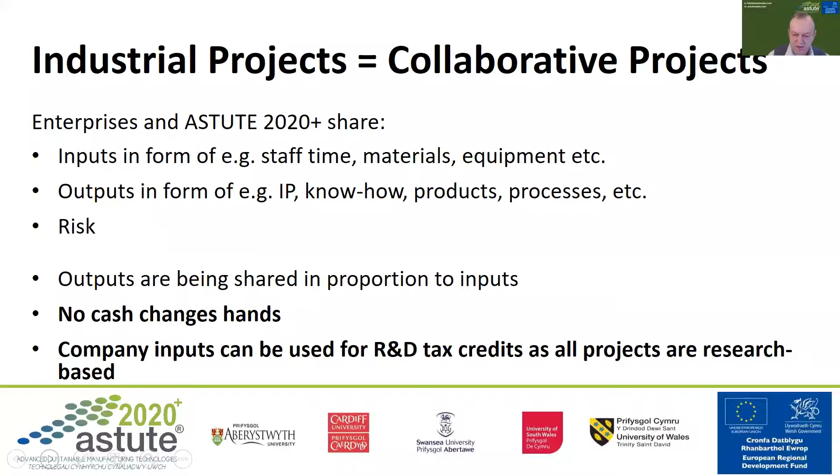Very importantly, ASTUTE is a partnership of the universities which you see at the bottom there: Aberystwyth, Cardiff, Swansea, South Wales, and Trinity St David. Jointly, we deliver this program working with companies across Wales.

There's a lot of information on the web which goes beyond what I've been saying, including contact details. If you want to browse around on astutewales.com, please also look at the project spotlight. Some of this will be presented now, but there are more on the website for you to have a look and get a feel for the kind of collaborations. At which point I'll hand back to James.

Thanks, Hans. I'm getting the feeling that I was about to say it's good to talk. I guess that's an advert that goes beyond most of the people online here. But I think this is one of the things I find: this is not perhaps a project that you know the answer to. This is something you need to discuss and find, if you want, ideas, whether they work or don't work. And I think that's the first place to start with these things.

You might not yet know, and it's good to see Don's question in there, it's open-ended. What on earth could we do with that subject? That is something that will improve our competitiveness, that was something that will improve our process, it's something that will improve our product, etc. It's good to talk, and I think that would be the first place of it. In essence, is that ability to talk to a group of people in the first place.

But I'm delighted now to introduce Professor Mohammed Naim. Mo is a good friend of ours here, and he's got something called Smart Specialist Leader. I always wonder about leaders who've got the word smart in it all, but there we are. Mo, I'm going to hand over to you here because I'm passionate on this one. How are we going to drive competitiveness forward?

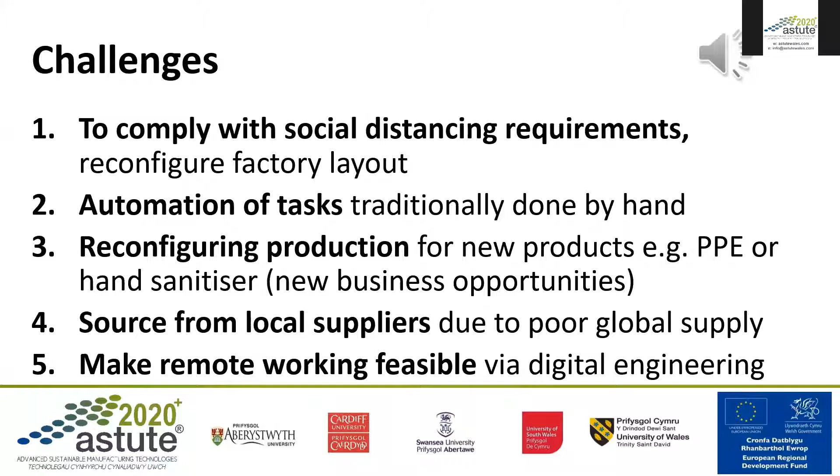So what we have done here with regards to opportunities is just translate some of those COVID crisis-specific challenges into generic opportunities, things we may have done ourselves anyway in order to achieve operational excellence, continuous improvement, but sometimes the crisis actually gives us the motivation to do things more quickly.

So for example, with regards to the first one relating directly to the previous challenges for the previous slide, with regards to social distancing, well actually, looking at our factory layout, looking at ways to streamline our material flows, our process flows, gives opportunity to improve in terms of reducing non-value-add activities and enhancing the value add throughout our total manufacturing process.

With regards to automation and enhancing automation, looking at robotics, for example, to reduce material handling, the opportunities offered by our research in robotics. We can look at ways to reduce the amount of handling actually required by individuals, and looking at ways also for individuals to be working with the robots in a sort of whole systems perspective.

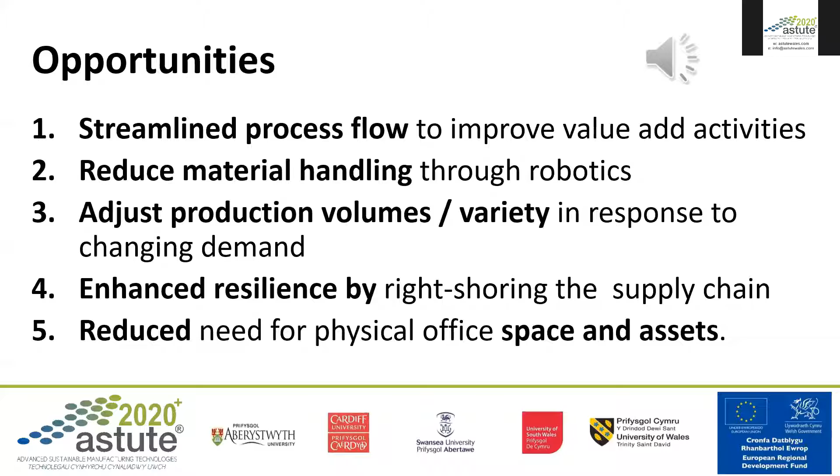new layout and in particular new ways of working. In this case, via gravity feeders for materials handling, avoiding direct contact between operators in relation to COVID. This gravity feed system and new layout led to productivity improvements.

The next one is an example of braking systems assembly in the automotive sector, the development of cobots, where we have within the same space both operators and robots. The main research challenge there is working safely, in this case with there being no longer a need for robots to be hidden behind cages.

The next two examples are both different companies, but both analytical equipment manufacturers. The first one, we looked at understanding and documenting current manufacturing processes, looking to enhance value-add activities within the manufacturing system, and identifying ways to enhance capacity.

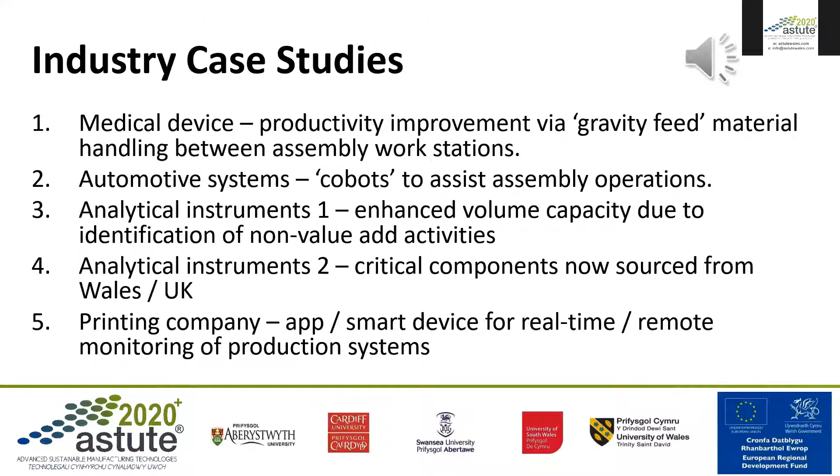I think it's quite clear here that over the last 12 months, we've learned that there are many things we can bring innovation to, and it's sometimes the mundane, but we were never getting around to it until the days we had to do it because of the context we were in. And that's one of the key things. We know that, for instance, productivity will step change after global recessions. Unfortunately, that quite often means people find solutions to do automatically what they were doing manually before. That's just the nature of these things. What we need to do is always do this and get ahead of it.

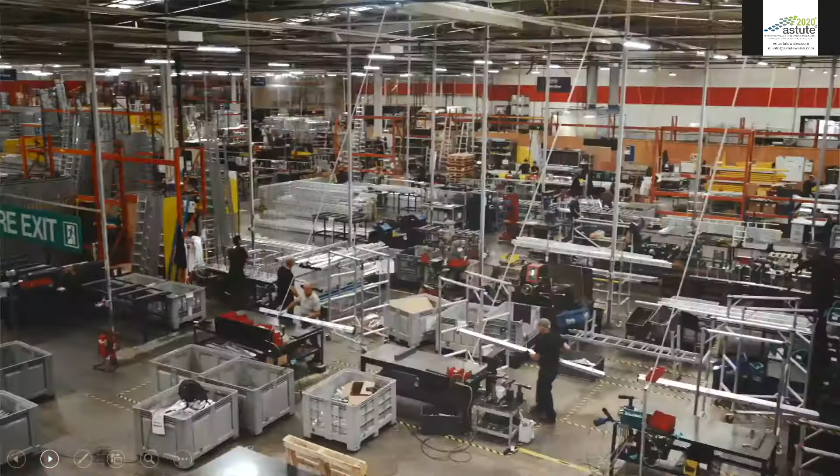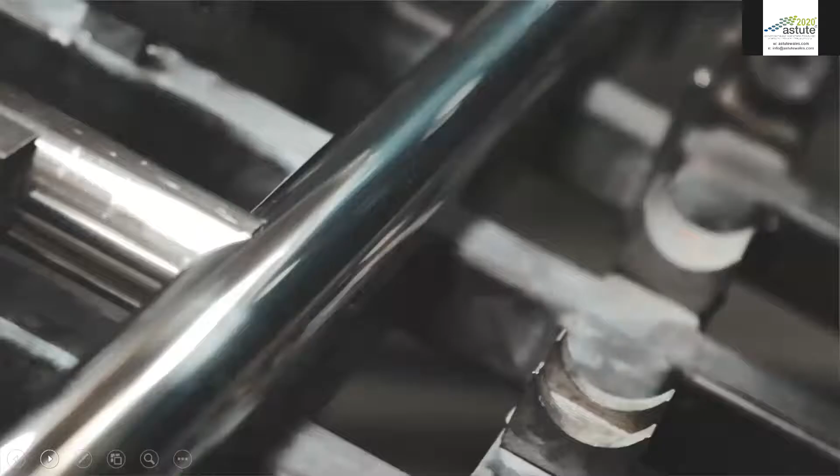We initially approached ASTUTE back in 2012 and have been collaborating with the team ever since on various research projects. This allowed us to develop and understand pre-welding processes and exploit ASTUTE 2020's research expertise to further our own knowledge.

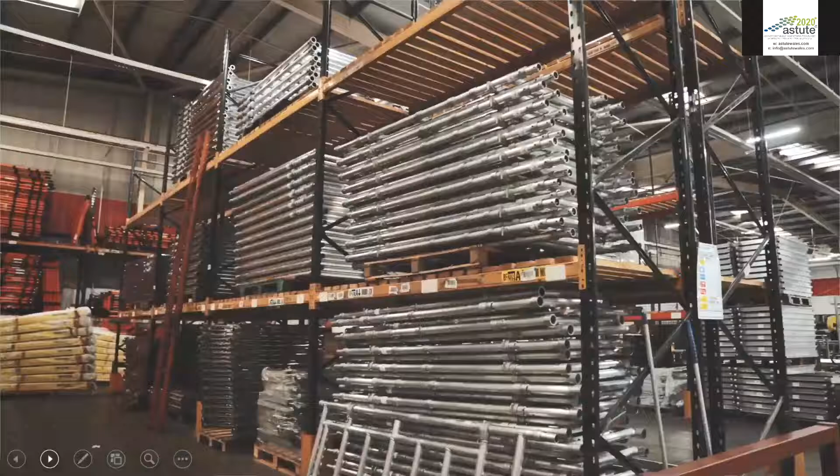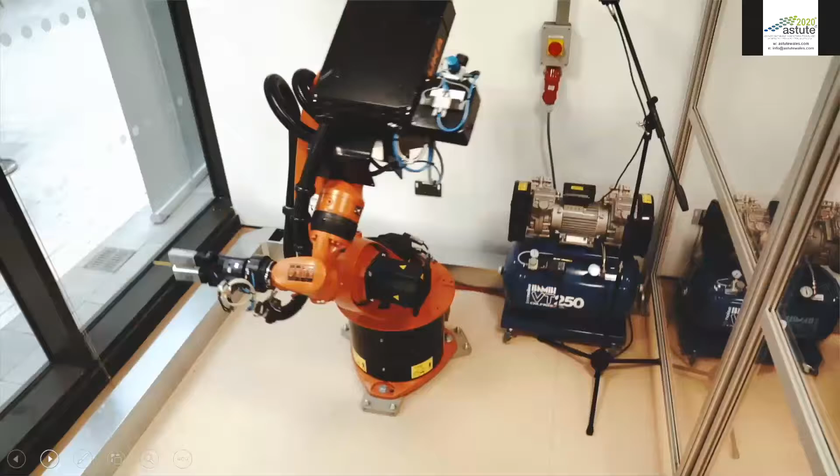We had difficulties in optimizing the robot welding process, resulting in a high number of defects, costing time and money for the business. ASTUTE 2020 were able to support us with their expertise in advanced materials, computer modeling, and manufacturing systems. The collaboration has assisted us to move from manual welding to more sophisticated automation for ladder manufacturing and scaffold towers.

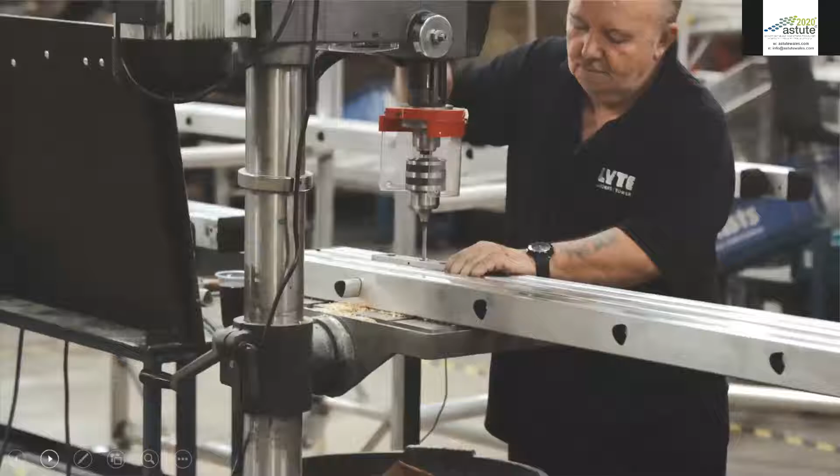As a direct impact of the collaboration, we've been able to increase our workforce, employing 7 new people. We have been able to expand our existing product range, as well as introduce new products to the market.

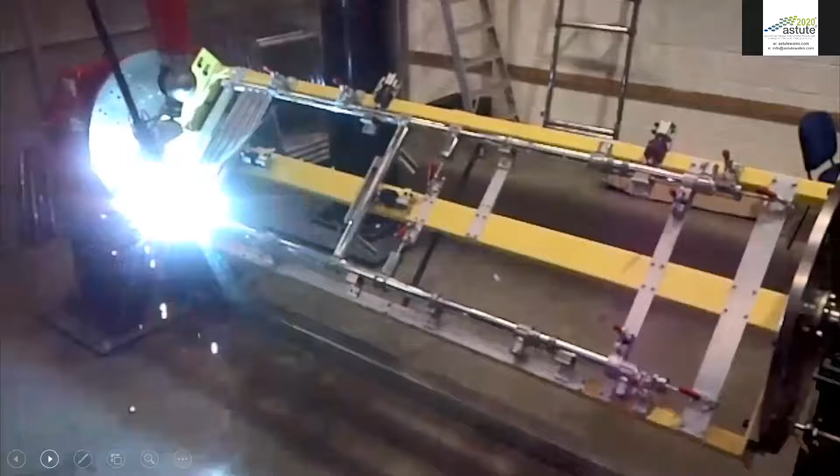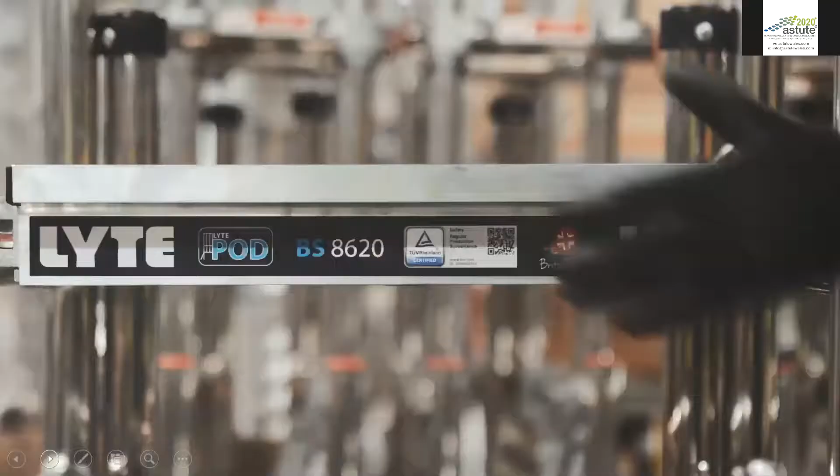The knowledge and understanding of our manufacturing challenge and the research conducted by the team allowed us to have confidence in the project being delivered successfully. Without ASTUTE 2020's support, we wouldn't be adopting advanced manufacturing technologies so quickly in order for us to improve the welding division of the business to ensure a long-term future for the company in West Wales and the Valleys.

It was great to know that this expertise was right on our doorstep in Swansea. We've had a great experience working with Swansea University, and we'd like the partnership to continue.

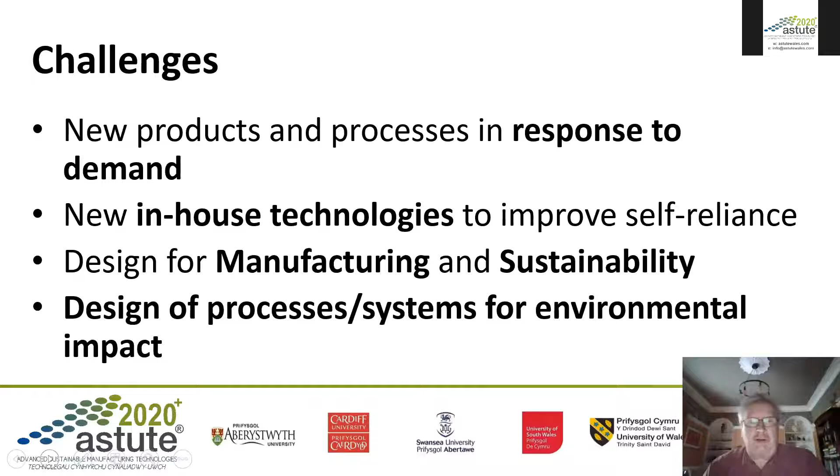ASTUTE is a brand that's been working with Welsh industries for a period of around 10 years. During that time, we have worked with businesses to support the development of new products, to support development of existing products, and to support development of process capability. And we can point to a number of successes in each of these areas.

In modern terminology, ASTUTE has been able to create virtual twins of the product or the process, and that can then be used by business for decision making.

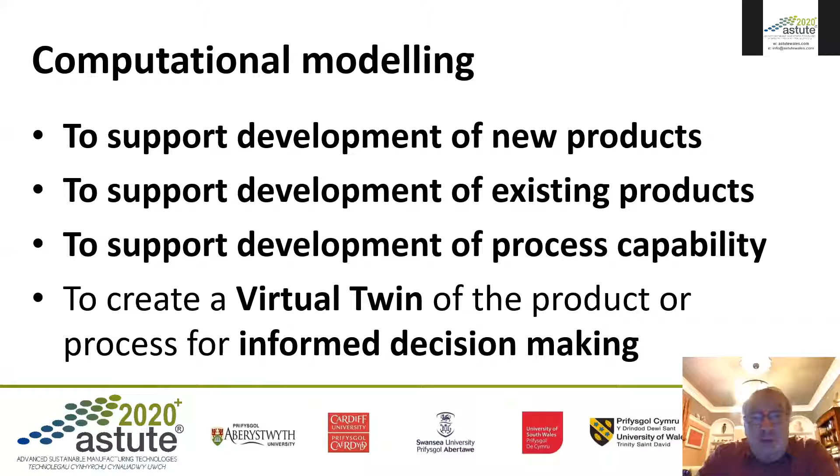ASTUTE offers opportunities to undertake computational modelling, and the expertise in ASTUTE can be set out under three main headings. Those are structural mechanics, whereby we deal with statics, transient, dynamic, and modal analysis; fluid dynamics, where we deal with mixing, separation, and phase flows of fluids and gases; and the third area, which is thermal, electromagnetic, and acoustic. And of course, we can bring those all together into complicated multiphysics modelling.

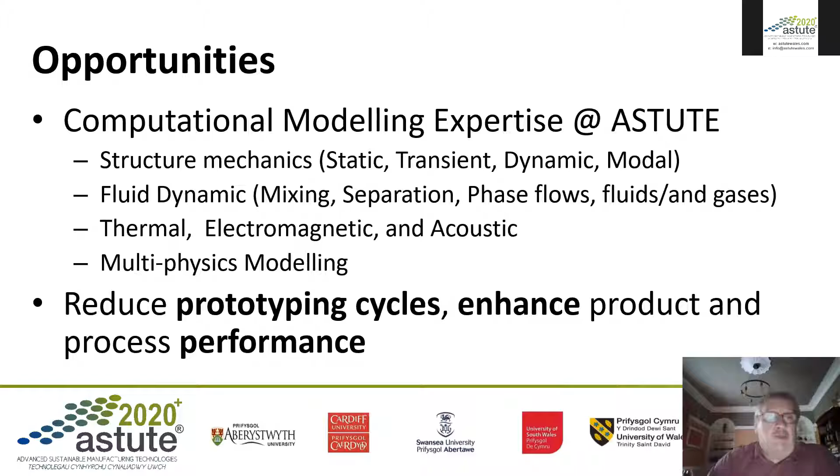And these have been used quite successfully to reduce prototyping cycles and to enhance product and process performance.

We will now look at two industrial case studies undertaken by ASTUTE. The first is aluminium tray forming, where the challenge is to form a perfectly rounded bead on the edge of the tray so it can be processed successfully in subsequent packaging operations. The second is laser trimming of a reverse extruded aluminium can, where the wavy edge around the top of the can must be removed by laser machining, and any particulate formed must be removed from the can.

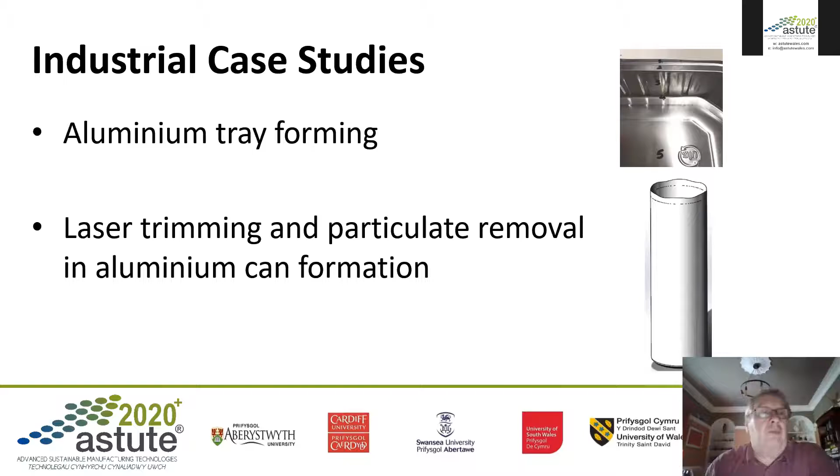We now look at the example of aluminium tray forming, and essentially it comprises three steps: deep drawing, wiping, and curling. Deep drawing is the way in which we manufacture the body of the tray itself, and this is a complicated process in that you have to have large deformation of what is originally a flat sheet of material. There is contact between the punches and the dies, and there's friction there, and again these parameters need to be incorporated into this part of the deep drawing module.

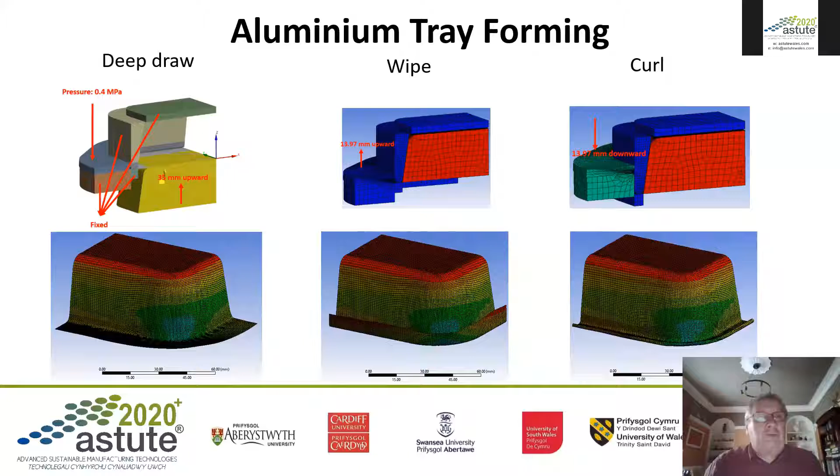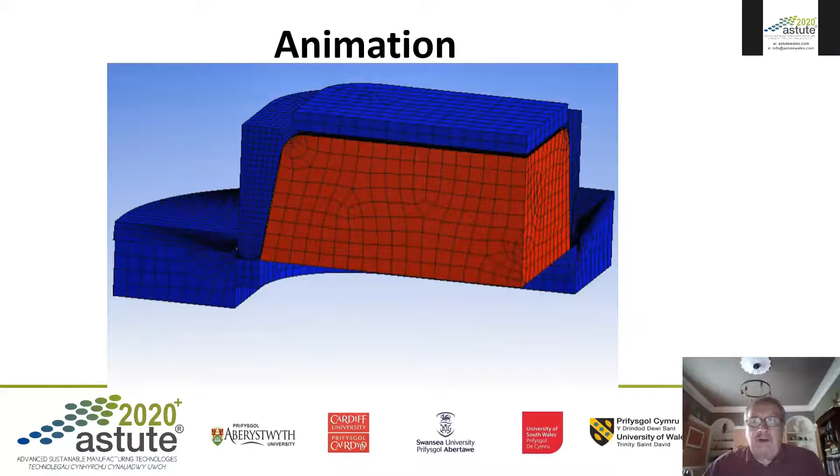This slide will show you the animation of aluminium tray forming. The sequence will show you the deep drawing, wiping and curling stages of the process. It'll all appear very much as a sequence of complicated and controlled tool movements.

This slide shows the outcome from the tray forming simulation, and inset we see an example of the defect on the rolled edge. In doing this work, ASTUTE worked very closely with the business partner, and at the end of all of this identified three potential solutions to address the problem of the tray edge defect. These potential solutions are now being carried through and tested further by the company.

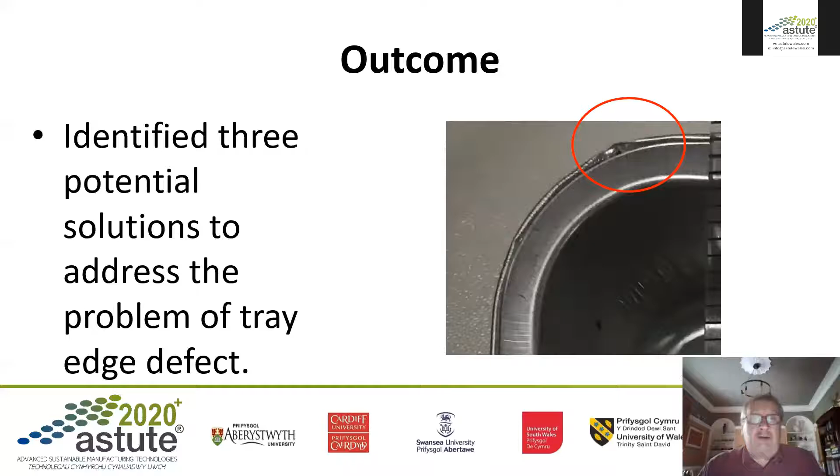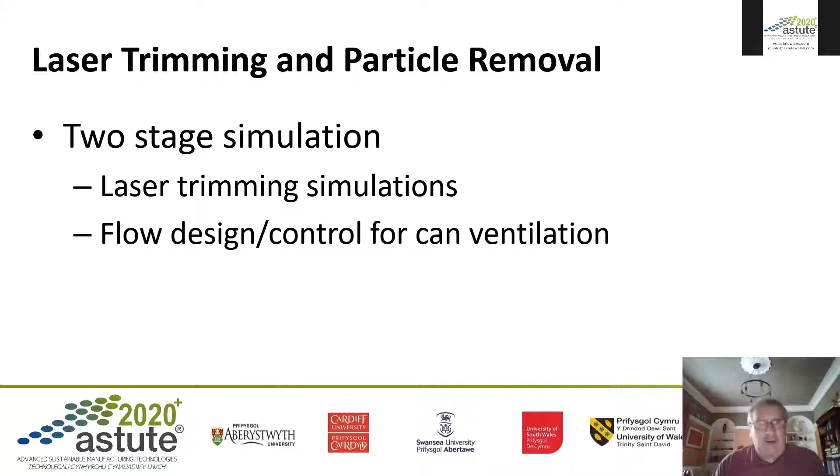This is the second industrial case study, whereby we're looking to trim the reverse extruded aluminium can. It's a two-stage simulation. The first stage is the laser trimming itself, whereby we generate some particulate debris. The second stage is to look at the flow and ventilation in the can in order to remove that debris prior to it going on to the next stages in operation.

This slide shows an example of the laser cutting process. It is a complicated process to simulate in that it has multi-phase flows, i.e. liquid and gaseous phases present. It is complicated by virtue of the fact that melting takes place, and if melting takes place, the material properties are clearly temperature dependent as well.

The model also has to account for the energy that is deposited onto the surface of the workpiece by the laser itself. What we can see here is a laser beam radius, typically 50 micron, to give you an indication of the size. What we see in the animation on the right-hand side of the slide is the penetration of the laser into the workpiece and the removal of the particulate from the workpiece as it goes through.

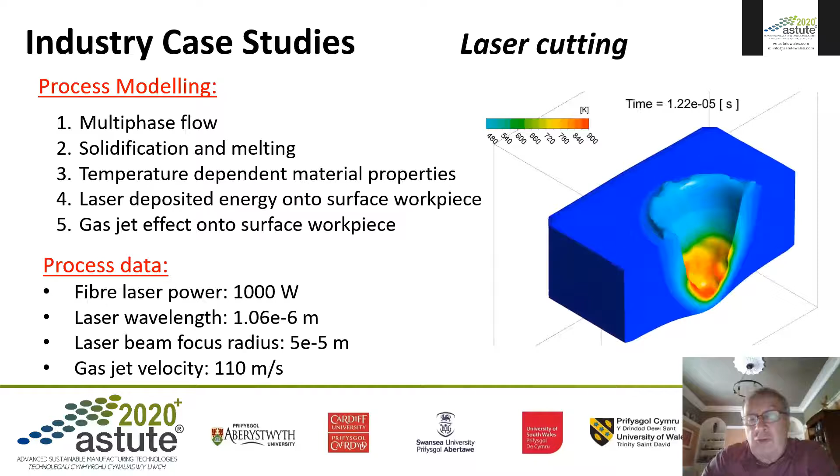This slide shows part of a parametric study into the ventilation of the can in order to remove the particulate. It should be noted that in this study the can itself is rotating and a gas jet is directed across the can at 0 degrees, which is across the diameter of the can, or at 15 or 30 degrees, which is there to introduce a level of swirl within the can itself.

The model is complex, it's multi-physics, in that there's a particulate phase and a gas phase, and the two interact. The aim of the study is to look at the way in which the gas phase will cause particulate movement out of the can in order to clear the can of debris.

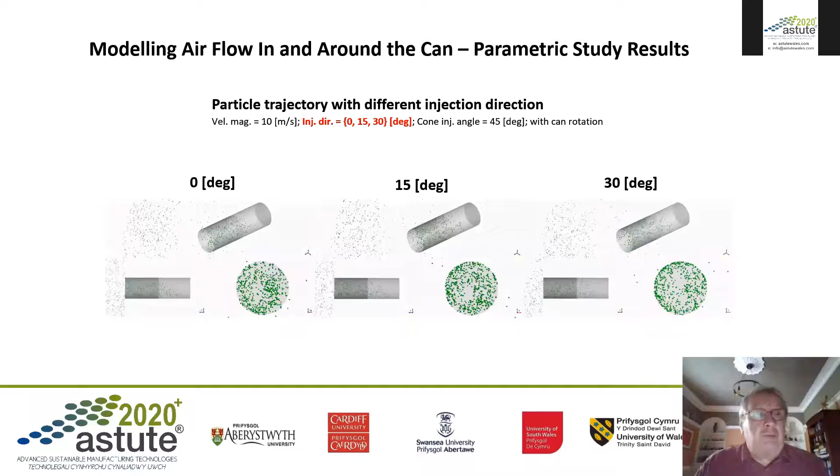This slide shows the outcome of the parametric study presented in the previous slide. What we see here is that, generally speaking, at 0 degrees, 15 degrees, and 30 degrees, there is little benefit, in that around 48 to 51% of particulate remain within the can. Needless to say, there are other parts of the parametric study which showed that there was an effective method of particulate removal, and further work is ongoing at this time to improve the understanding of the ventilation process.

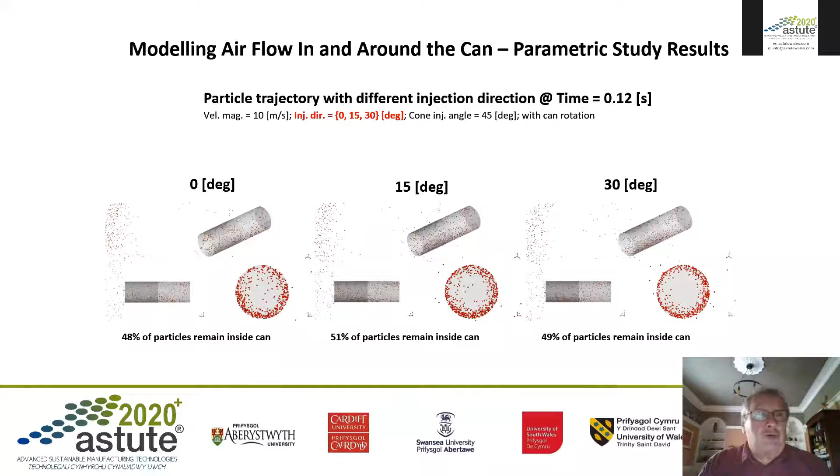So the outcome of the work on laser machining and can evacuation has developed what is really a process virtual twin. And that has aided the understanding of a challenge that has been in existence for a period of around about 7 years.

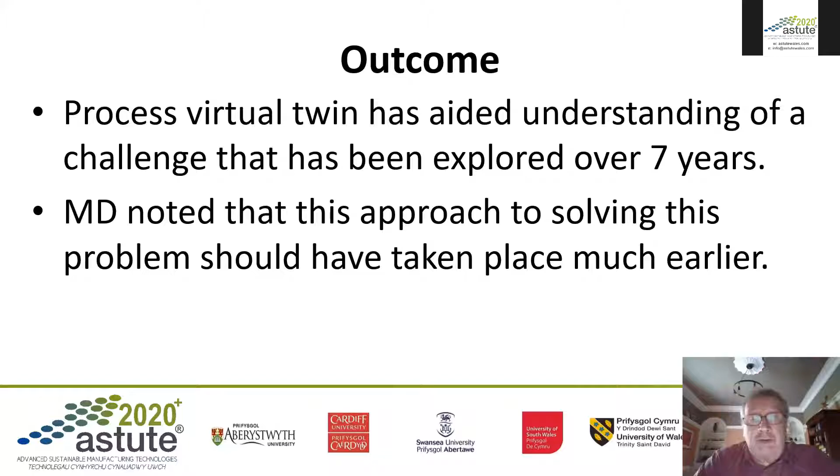Complementary to this is the fact that the MD noted that this approach to solving this problem should have been taken much earlier. And the company is now actively pursuing the opportunities that have been provided from this simulation study.

Thanks, Dave. I always love that presentation. I've seen it once before, Dave, and I love it because it's the bit that you don't say. All the people online are going, well, why did you do the parametric study that showed no difference? Why didn't you show the one that made the big difference? And I guess that relates to one of the questions about confidentiality. The bits that really made the difference are the bits that Dave can't show you, because that's the company's IP advantage right now. So I'm grateful for that.

We're going to move forward now into another case study by British Rototherm. And again, this will be highlighting the computational modeling activity on this particular issue.

Thank you. I'm Oliver Conger, Managing Director and owner of British Rototherm. We're a 170-year-old organisation, and we manufacture precision instrumentation that measures temperature, pressure, level and flow. I heard about ASTUTE 2020 from an organisation called Make UK, and they connected us with the right people in ASTUTE.

They've got a very strong technical understanding, especially around computational fluid dynamics, which was crucial for what we were trying to study as part of this program. The problem we were trying to solve was, what is the noise emitted through one of our restriction orifice assemblies? As pressure flows through one of these devices and it drops, it creates noise, and the noise can also lead to vibration and potential problems for the rest of the pipeline.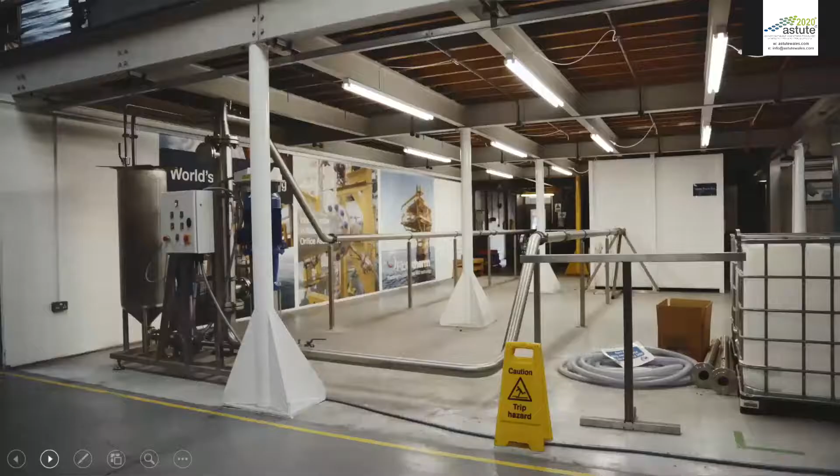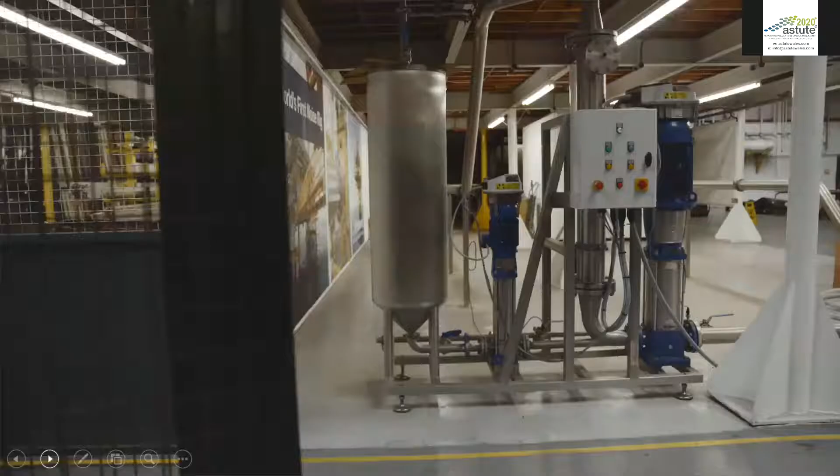There is nothing available for restriction orifice plates, so we wanted to come up with a proven model that we could then take to designing a better product. So from Astute's side, they came in, we broke down the problem into a number of different steps, and together with our own team, we put together a project plan to be able to come up with a model and test that for the restriction orifice plates.

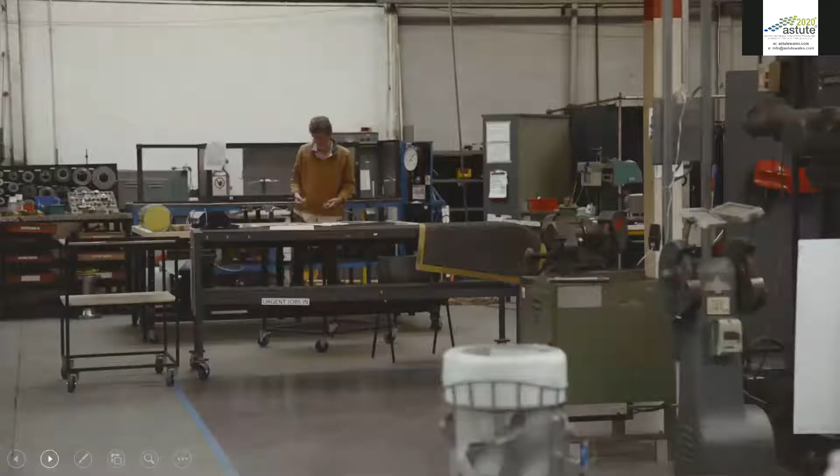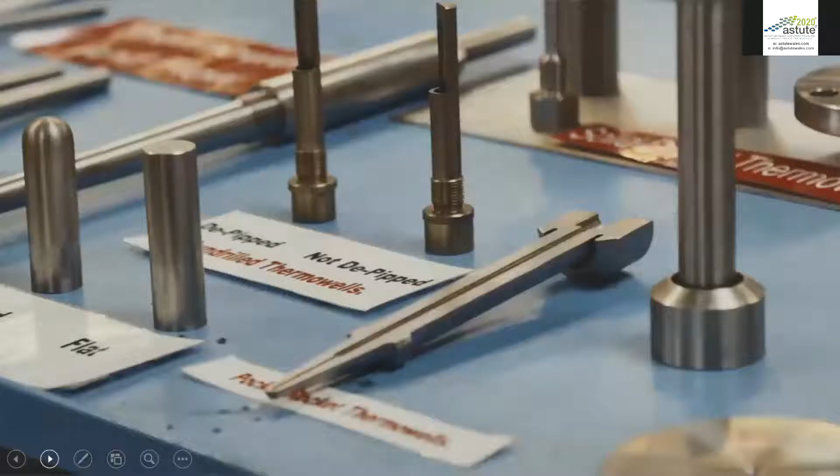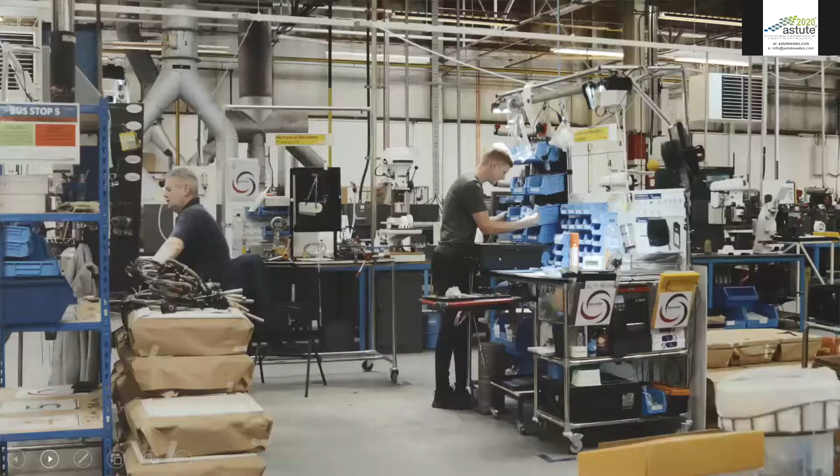What Astute ended up doing, they helped us prove the model, and then that model was tested through some pretty sophisticated CFD software. The orifice plates that we were selling now were designed on a proven formula for noise, which nobody in the world has. From that, we were able to go to our customers and prove to them that our design was able to meet the noise requirements. This has led to a number of significant projects we've been able to secure worldwide, and also resulted in us being able to employ a further 5 people in the organization and invest in additional machinery to really put us as a leader in this field.

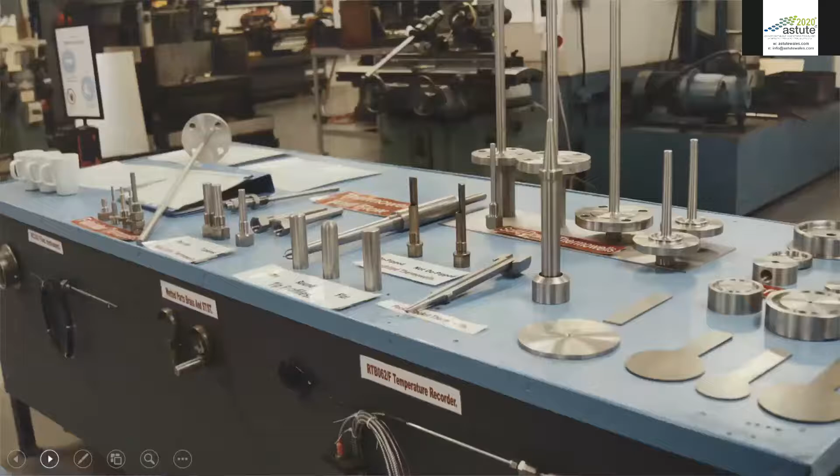The reason for working with Astute, they have a significant amount of technical capability. They have access to programs, software and resources that a company such as Rototherm doesn't have. They can help provide confidence to take something that you may not have gone forward with.

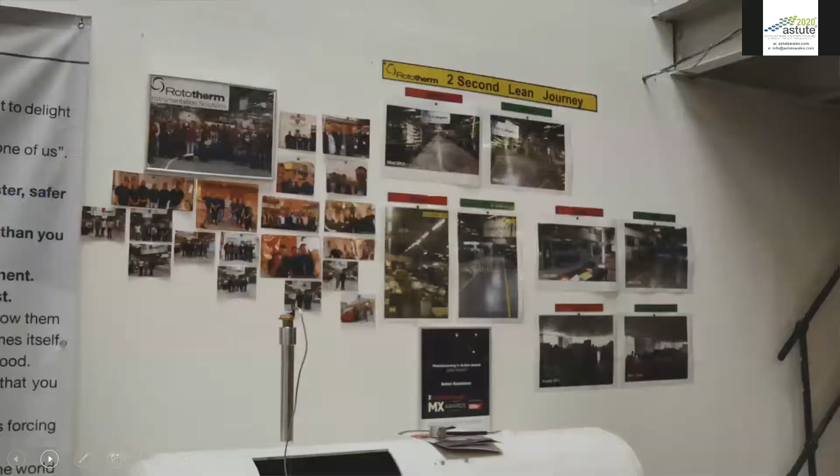Since we've completed the project, we've been working with the M2A program, so we have a student here for 4 years. We've got a proven model for calculation of noise through one of our devices, and that has led us to now bid on projects. It's resulted in us winning the largest ever order for this particular product line for Vietnam. So it's been a super success.

That's great. I mean, Oliver, Tarquin may be online, I don't know. So I know I've missed an email from Tarquin yesterday, which I need to catch up on.

But, you know, these are really examples of doing something significant as regards global leadership on some of these things. So thank you for that, British Rototherm, today. We're going to move forward again to try and maintain an agenda here, and we're pleased now to invite Dr. Gavin Bunting to talk on sustainable materials.

Ultimately, when we talk about sustainability, and we know that we need to take more and more carbon responsibility ourselves, not purchase carbon, not procure everything, but take responsibility ourselves, ultimately that will always bring us back to materials. So delighted, Gavin, if you can take us forward from here.

Thanks for the introduction, James. As with Mo and David, I've also got a pre-recorded presentation here available. Hello, I'm Dr. Gavin Bunting, Deputy Director of Astute and Associate Professor in the College of Engineering here at Swansea University. Today I'm going to give an overview of some of the world-leading materials research support available to companies collaborating with Astute.

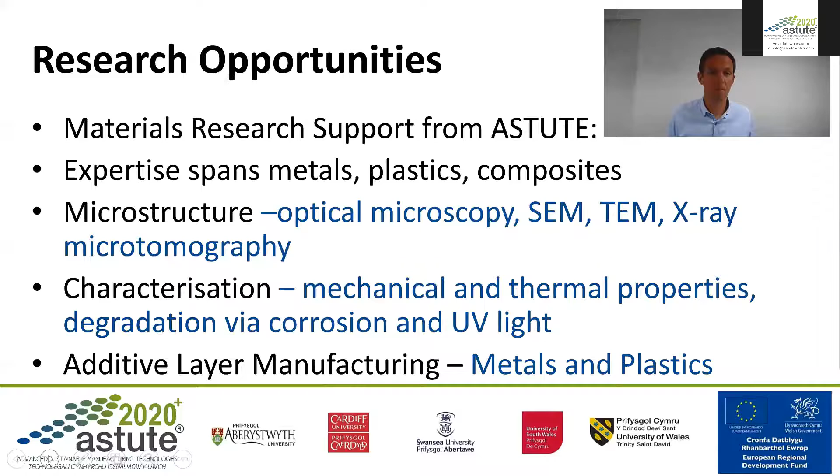Optical microscopy can be performed on cross-sections of materials, and we have state-of-the-art capabilities for metallographic preparation as well.

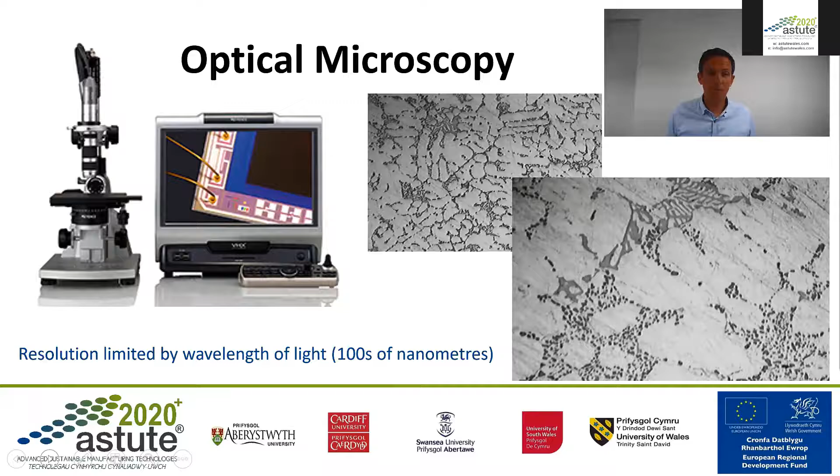The SEMs are also equipped with energy dispersive X-ray analysis, which can reveal the chemical composition of, say, different phases or inclusions. In addition, there is also a focused ion beam, which can accelerate ions to selectively mill out areas of a sample to study composition variation as a function of depth.

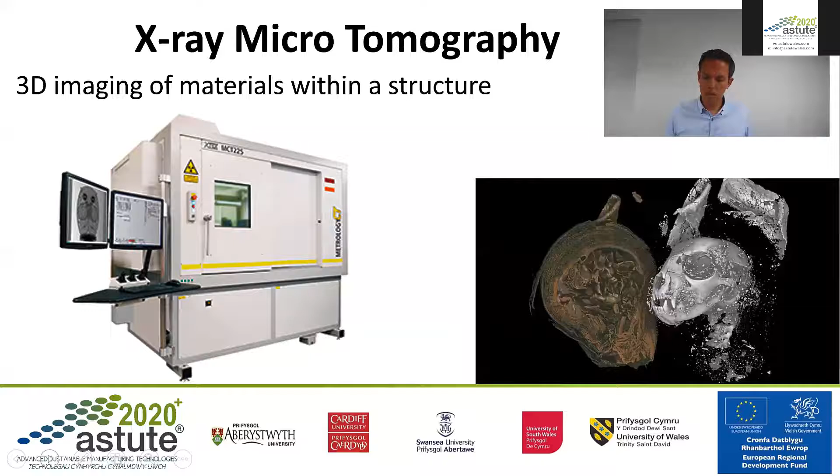So that's it on the microscopy side of things. Next, I wanted to highlight our metal additive layer manufacturing expertise and facilities. A lot of you will be familiar with 3D printing, and as well as your common polymer 3D printers, we also have state-of-the-art metal additive layer manufacturing, which prints directly from metal powders.

This can achieve very intricate shapes that can't be produced by traditional casting techniques. 3D printing can cut material consumption and CO2 emissions within certain applications. It can also support design optimization and is useful in low volume production scenarios, such as spare parts for an aircraft where they're printed to order. Automotive, aerospace, defense are currently the largest manufacturing sectors using this technology. However, it's also now being used within dental printing, medical implants, and device printing and product creation.

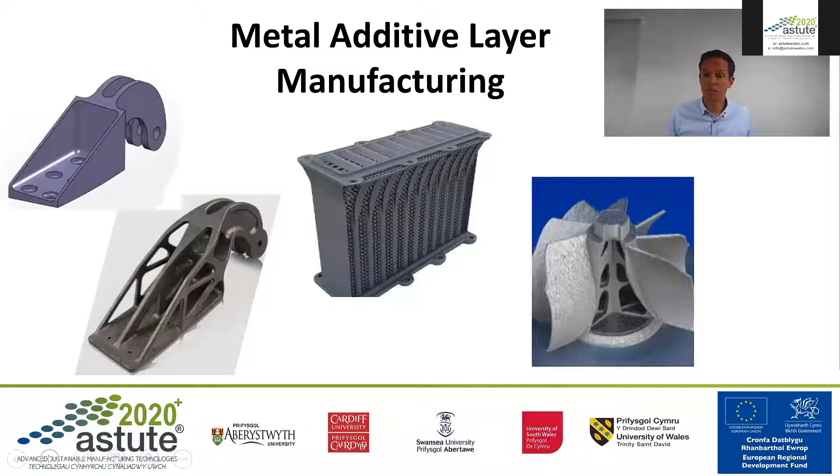We also have a post-processing facility called a hot isostatic press, which provides a combination of high temperature and high hydrostatic pressure to close up any residual porosity.

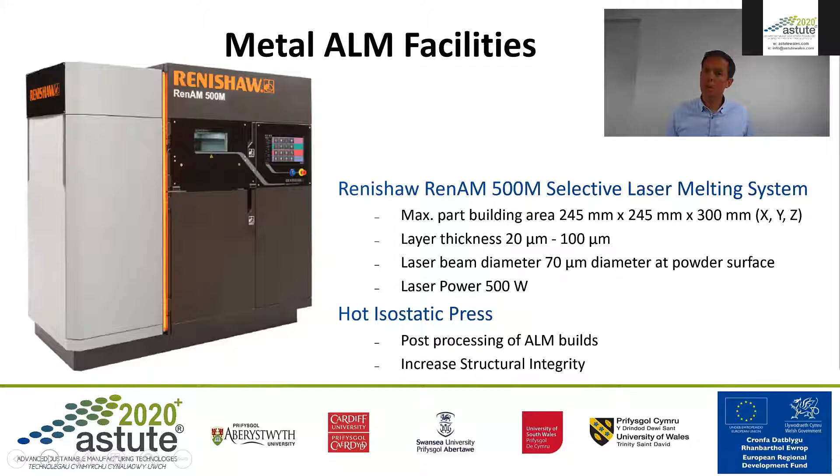So that's it on the facilities. Next, I really wanted to highlight what the current pandemic poses for material selection and materials challenges. It poses challenges for us all. There's some specific materials challenges associated with COVID-19, for example, the need for sterilization of products or other cleaning techniques to be applied.

Need to consider implications for the materials - will they withstand temperatures and/or chemical agents used? There's a need for antimicrobial products and coatings. New ways of doing things post-COVID may lead to demand for new products. Also, as one would expect, there is need for more advanced medical products and devices, and it's an example of this I want to highlight next.

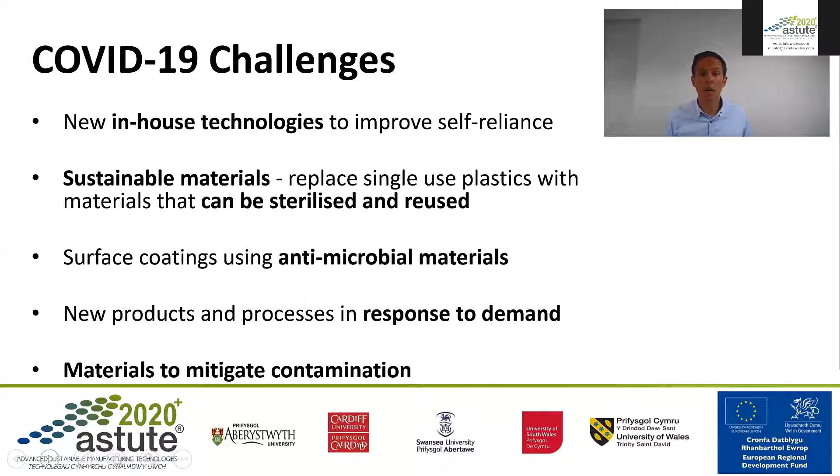So, CoronaVent-One. This case study provides an example of how ASTUTE rapidly responded to urgent need for manufacturing a prototype ventilator. The ventilator was built quickly from local parts and can be used even for patients with severe coronavirus. It was built within 10 days from locally available materials and skills.

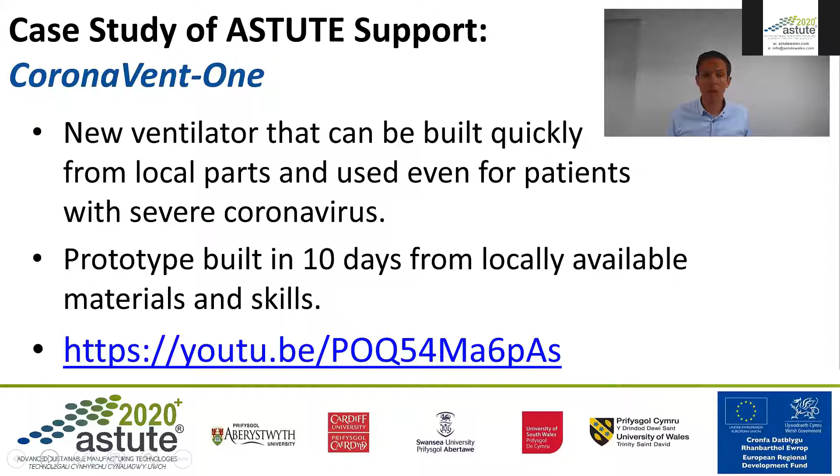And I've got a video now showing this.

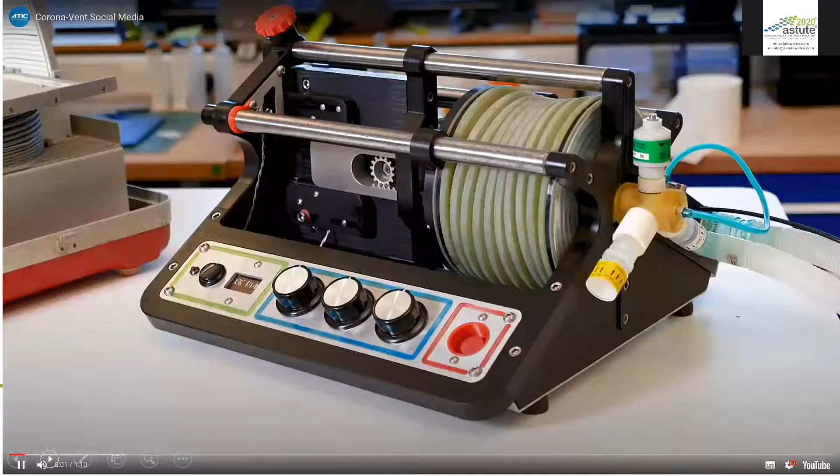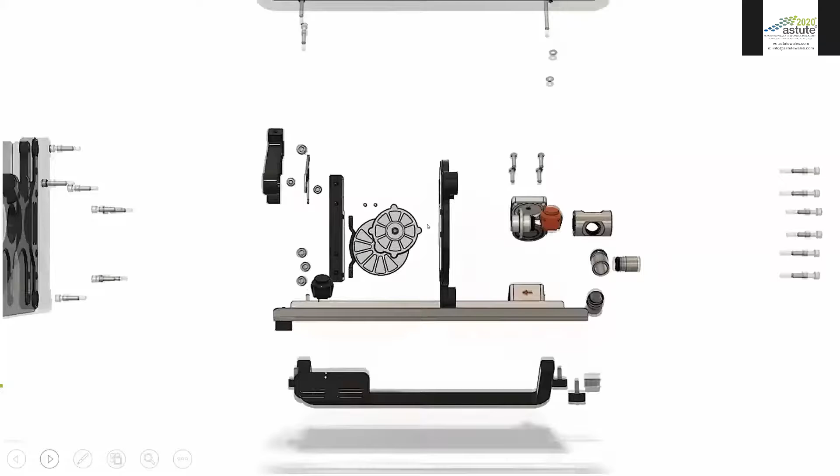The Corona-Vent 1 was built in 10 days from commonly available materials and using locally available skills. It has the minimum possible number of specialist medical parts. It's completely optimized for the types of lung problems seen in COVID patients. We're currently developing Corona-Vent 2.

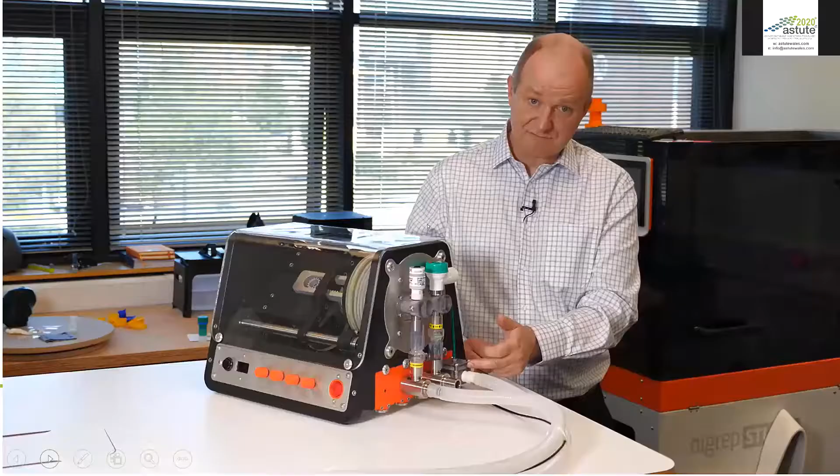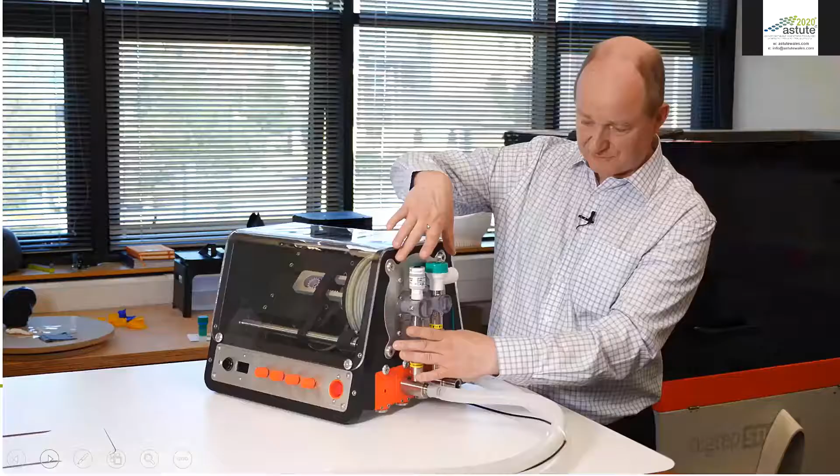The differences from the initial prototype are that it's splash proof, the gas now enters through this port here. The check valves can be any design that you have available. The exhale gas comes through this diaphragm valve, which again can be made by 3D printing or machined from stainless steel. If you wish to clean the inspiratory side of the system, the bellows unit unclips on the inside and the whole thing is extracted through the end here. So the entire gas pathway can be dismantled for cleaning, but particularly the expiratory side is just this part here, which comes off very quickly.

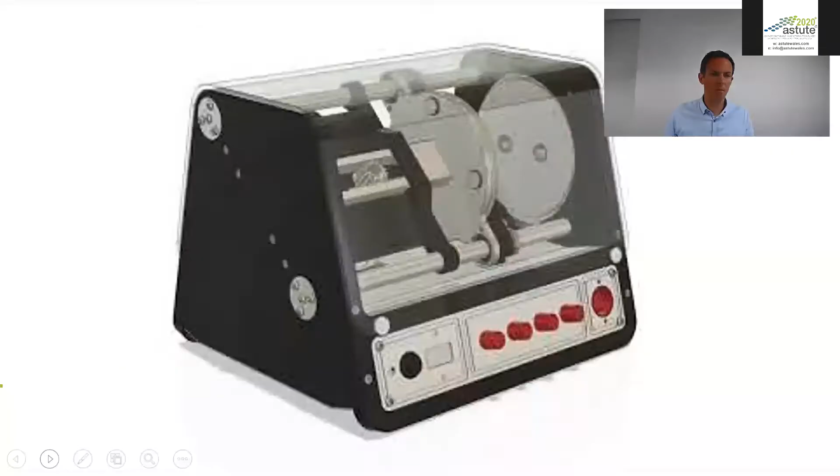So I think that was an interesting case study showing how we responded quickly and efficiently to produce a prototype ventilator. To summarize, we have leading edge materials analysis and characterization facilities supported by world-leading academics, and we can work with companies responding quickly and efficiently to help them innovate and develop new products and services. Thank you.

Thanks, Gavin. I was back on mute. That was my fault. Those of you seeing the Q&A, I'm trying to actively answer Q&A at the same time and actually saying hello to a few as you're going along. So I'm grateful for that.